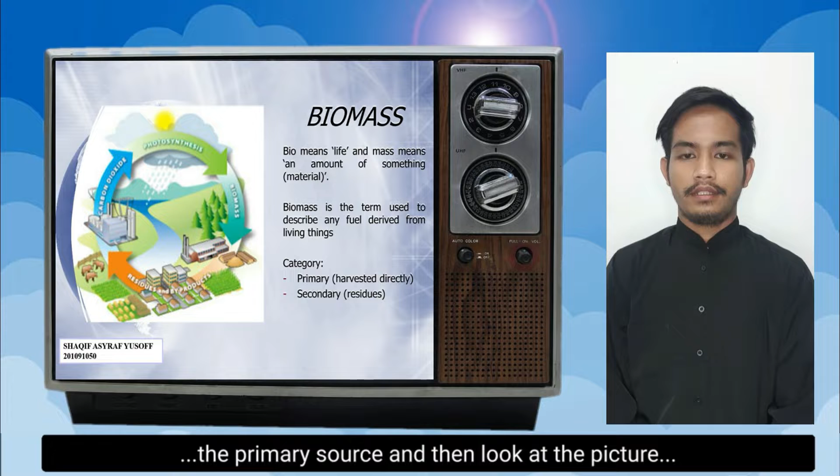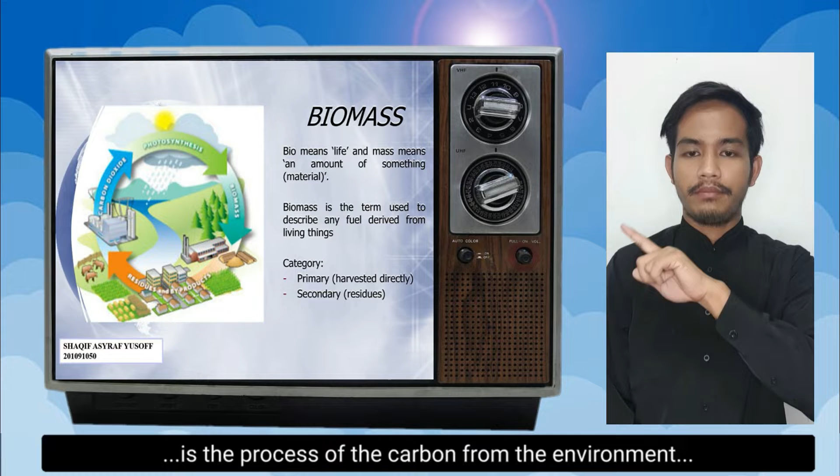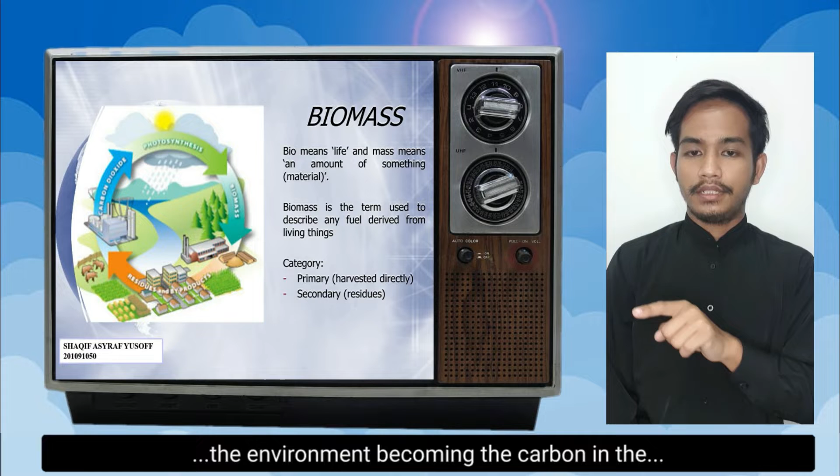Look at the picture on the left, that is the carbon cycle, which is the process of carbon in the environment being absorbed by plants through photosynthesis, and then we use it as biomass energy. After that, the byproduct is released into the environment, becoming carbon in the environment again, and the cycle returns.

There are 6 typical biomass sources: forestry crops and agriculture, MSW or municipal solid waste, industry residues, animal residues, agriculture crops and residues, and the last one is sewage.

There are mainly 3 methods of harvesting energy from biomass: thermal, chemical, and biological conversion. In thermal conversion, we have...

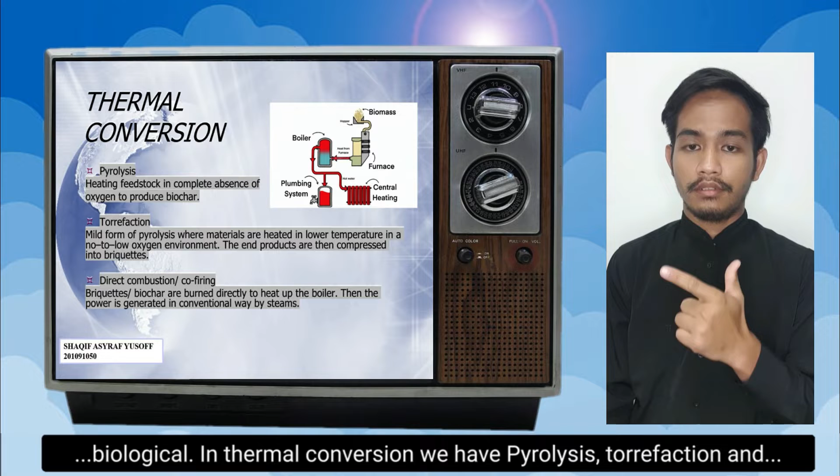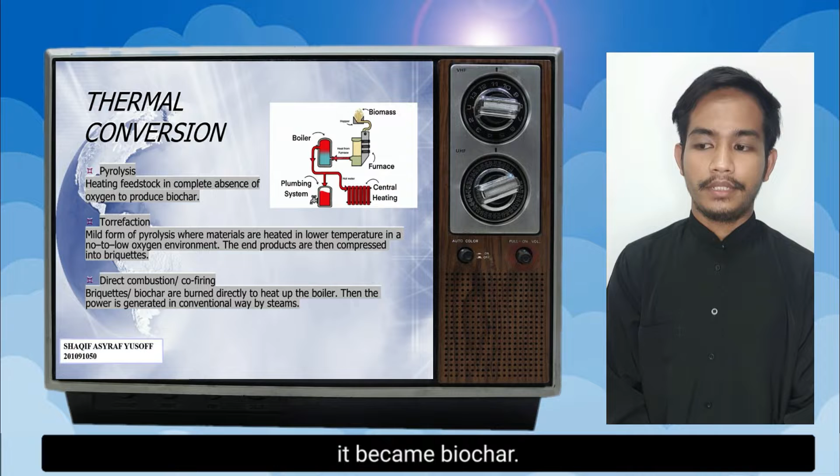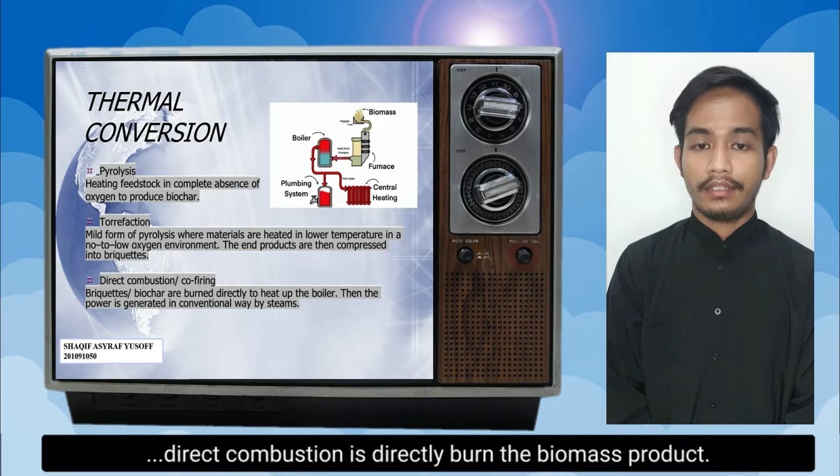pyrolysis, torrefaction, and direct combustion, where in pyrolysis we heat the biomass product in complete absence of oxygen until it becomes biochar. The same process applies in torrefaction, but a lower temperature is used in heating the biomass. Direct combustion is directly burning the biomass product.

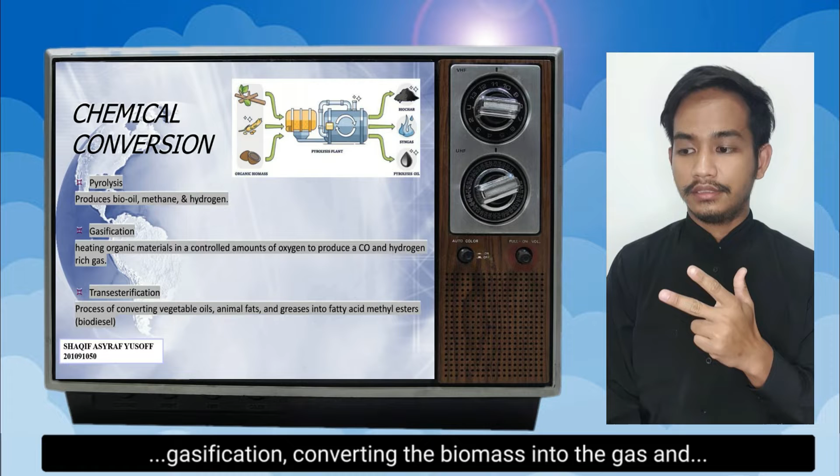Next, we have chemical conversion. We have 3 types of chemical process: pyrolysis, just like in thermal conversion; gasification, converting the biomass into gas; and transesterification, converting vegetable oils and animal fats into fatty acids that we can use as biodiesel.

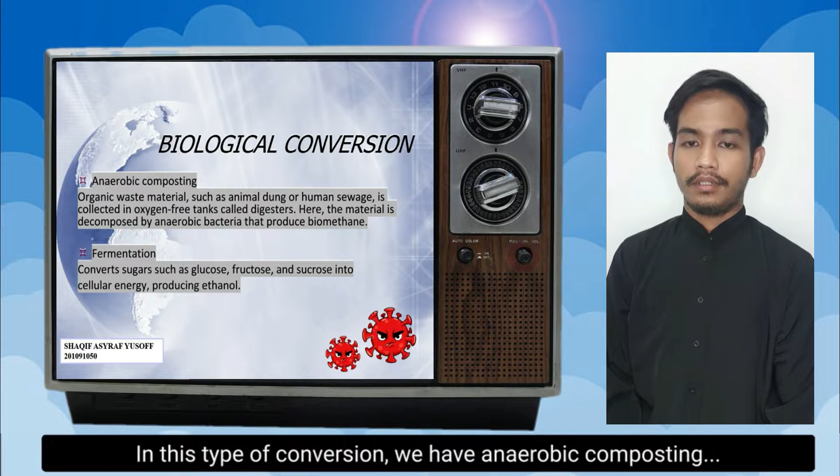Lastly, we have biological conversion. In this type of conversion, we have anaerobic composting, that is collecting organic waste such as animal and human dung into a tank in absence of oxygen, then letting composting bacteria decompose the biomass in absence of oxygen, letting the bacteria respirate anaerobically to produce biomethane.

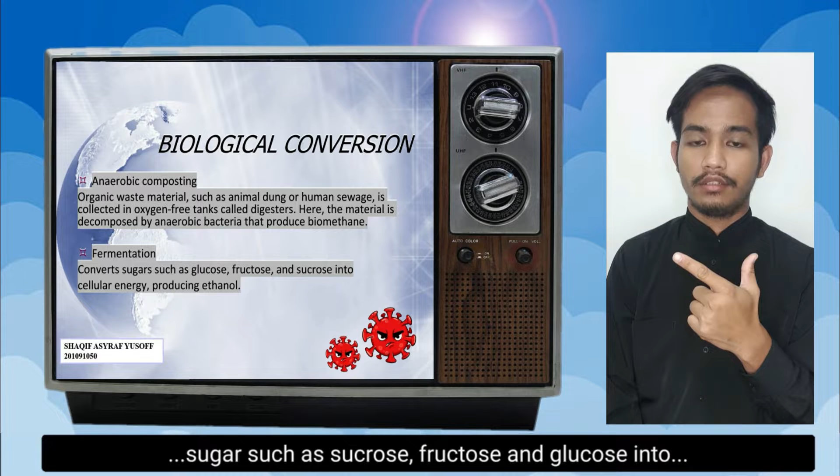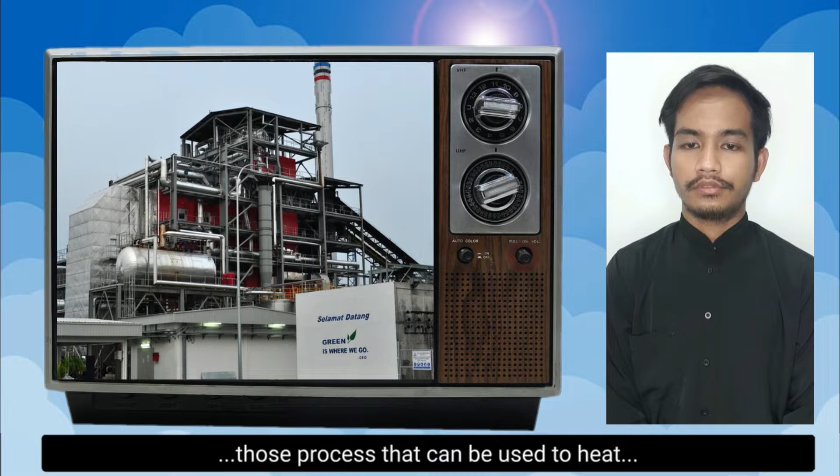Second is fermentation, which is converting sugar such as sucrose, fructose and glucose into cellular energy by producing ethanol. Those fuels produced by these processes can be used to heat up boilers to make steam and conventionally generate energy like other power plants.

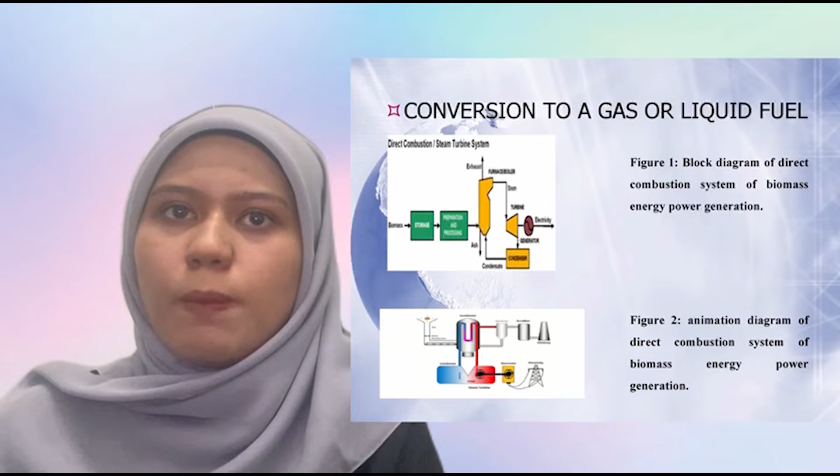In this assignment, we consider a general model for a biomass particle of arbitrary size in which chemical, physical, and thermal processes are taken into account. The model can be readily extended to 2 or 3 dimensions. The particle geometry can be spherical, cylindrical, or slab, and is represented in a one-dimensional framework.

For the shrinkage model, the shrinkage factor accounts for the change in volume due to particle mass loss, which takes place when a particle undergoes thermochemical conversion. The shrinkage factor theta is defined as the ratio between the current volume of a particle and its initial volume. A value of 0 represents constant density, and 1 represents constant volume during thermochemical conversion.

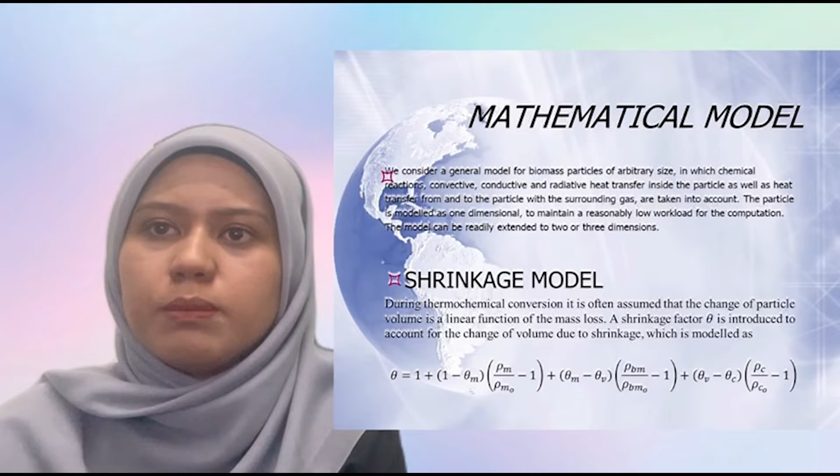If char oxidation is controlled by external diffusion, it can be assumed that during the char reaction the density remains constant. Shrinkage not only happens due to the loss of mass from the particle, but also due to rearrangement of the chemical bonds and structure of virgin biomass and char.

Second is the pyrolysis model. Biomass pyrolysis is a multi-scale chemical and physical process. A fundamental modeling approach should be built up from the smallest relevant scale, taking into account the detailed physical and chemical processes. It was shown that for low moisture, the structure of the pulverized wood flame is not sensitive to the use of different models. A systematic approach is employed to compute the yield of different gas species and the composition of tar.

Depending on the reactor conditions, the amount and composition of char residue can be different. Typically, char consists of carbon and a smaller amount of hydrogen and oxygen. This means that for operating conditions similar to those of an industrial furnace with a high heating rate environment, the assumption of pure carbon for char is reasonable.

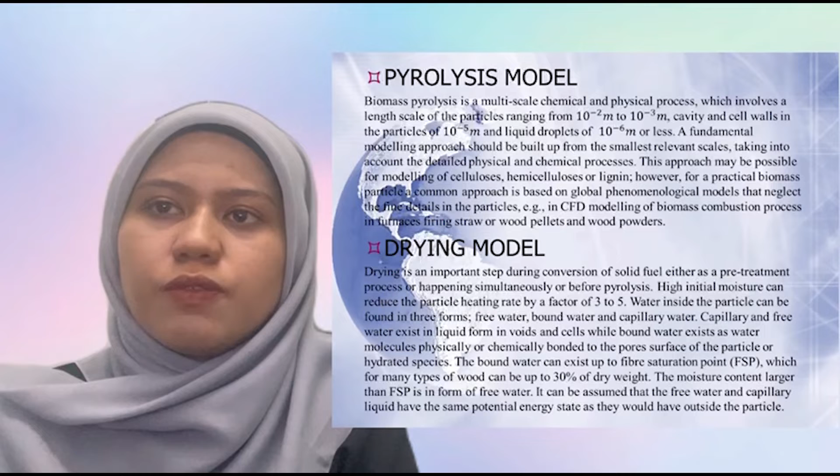Third is the drying model. Drying is an important step during conversion of solid fuel, either as a pre-treatment process, or happening simultaneously with or before pyrolysis. High initial moisture can reduce the particle heating rate by a factor of 3 to 5. Water inside the particle can be found in three forms: free water, bound water, and capillary water.

Okay, that's all from me. Thank you.

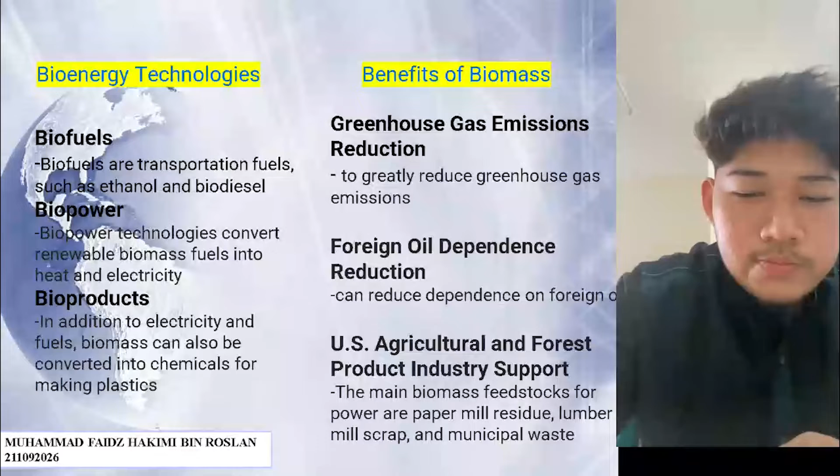Biomass facilities can generate anywhere from 2 to 1,000 megawatts of electricity. At the end of 2014, Canada had 70 biomass power plants, which together can produce 2,043 megawatts of electricity. Industries such as pulp and paper plants use about two-thirds of this electricity.

Atikokan Generating Station is North America's largest 100% biomass power station, located in Northwest Ontario. This station used to generate power by burning coal. After modification in 2014, it now burns wood pellets, generating 205 megawatts of electricity, enough to power about 70,000 homes.

The three most common sources are natural gas, coal, and nuclear power. Some of the faster growing sources are renewable resources such as wind and solar. Most United States electricity is generated at centralized power plants. A much smaller but growing amount of electricity is produced through distributed generation, a variety of technologies that generate electricity at or near where it will be used, such as on-site solar panels and combined heat and power.

Approximately 86% of modern bioenergy is used for heating application, with 9% used for transport and 5% for electricity.

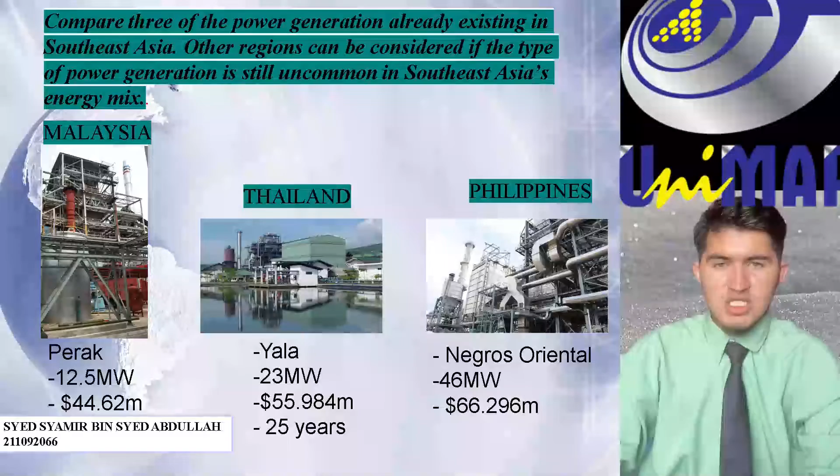Next is Kabankalan Biomass Power Generation in the Philippines, located in Negros Oriental, producing 46 megawatts and costing 66.2 million. Energy security is among the top concerns of the Philippines as a developing economy. The response to such a challenge is to prudently manage the existing supply of fuels such as coal and oil, upon which the country's energy mix has mostly been based. However, with growing worries about environmental impact, as well as the rising cost of these energy sources, exploring renewable alternatives has become urgently necessary.

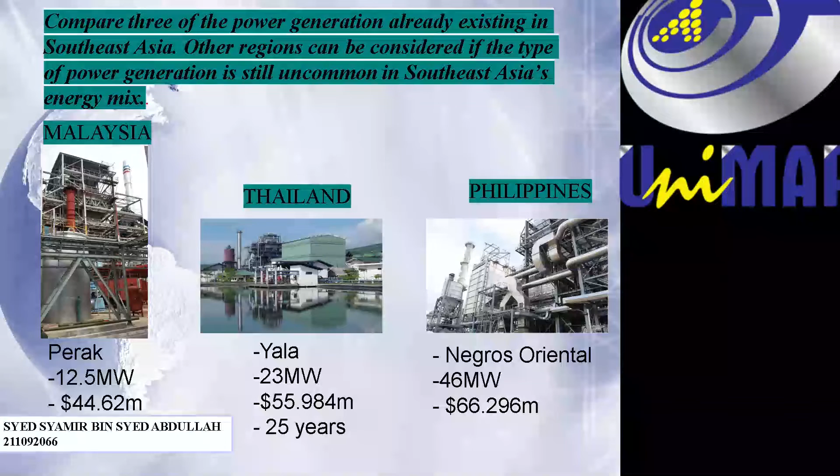Today I'm going to present my part of the power system assignment task. This presentation includes two parts: the advantages and disadvantages of biomass power systems.

Due to the abundance of plants on Earth, biomass has the potential to be a significant source of renewable energy that can be utilized as a long-term replacement for fossil fuel. Biomass is regarded as a renewable energy source since it can quickly regenerate and because the energy it emits comes from the sun. The carbon dioxide that trees have taken in from the atmosphere is released back into the atmosphere when they die.

Furthermore, our over-dependence on fossil fuel is reduced by biomass. Fossil fuels are not only limited in supply but also have detrimental consequences on the environment due to the high volume of carbon dioxide they emit into the atmosphere, and the pollutants created during production, transportation, and extraction.

What role does biomass play in reducing our reliance on fossil fuel? Numerous fuels such as bioenergy, also known as energy from biomass, are a sustainable alternative to fossil fuel that may be produced from renewable sources like plants and waste that can be continuously supplied. Next, the production of biomass provides manufacturers with a new stream of revenue by converting their garbage into biomass energy.

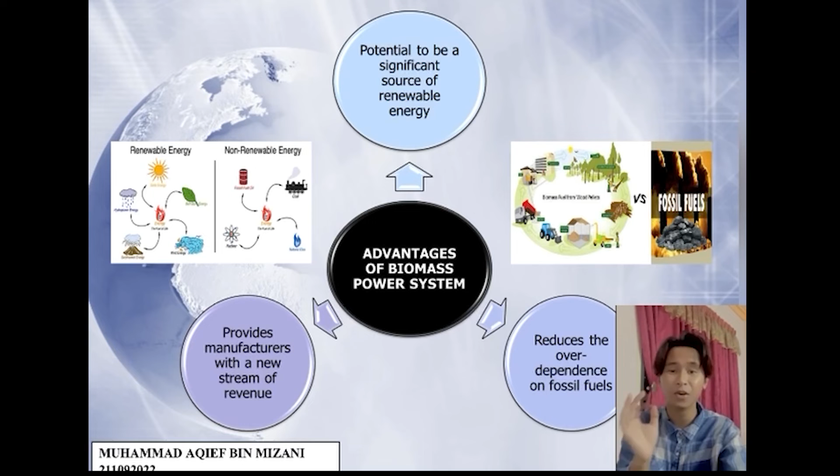Producers and manufacturers might make more money from a smaller production by generating new jobs, boosting economic growth, and fostering a greener environment by reducing emissions and air pollution. Biomass energy provides the local community with significant economic benefits.

For the disadvantages part: compared to fossil fuel, biomass energy is less efficient. The main disadvantages of biomass energy are that it is expensive, requires a lot of space, still releases greenhouse gases, can have a negative impact on the surrounding environment, and is inefficient in terms of how much energy it takes to create electricity.

Some biofuels such as ethanol are less efficient than gasoline. In order to boost effectiveness, it actually has to be strengthened by fossil fuel.

In addition, biomass is not completely clean. Even though biomass is carbon neutral, combining human and animal waste increases the amount of methane gases, which is also bad for the environment. Furthermore, pollution from burning woods, plants, and other natural resources can be contrasted with pollution from burning coal and other types of fuel.

Burning organic material produces heat, which creates steam that powers a turbine to produce electricity. This process is known as biomass or organic matter combustion.

Lastly, biomass may lead to deforestation, since one of the most popular biomass energy sources is wood. A huge amount of wood and other waste must be burned in order to produce the necessary amount of energy. That is a danger of future deforestation even if there is currently enough wood debris.

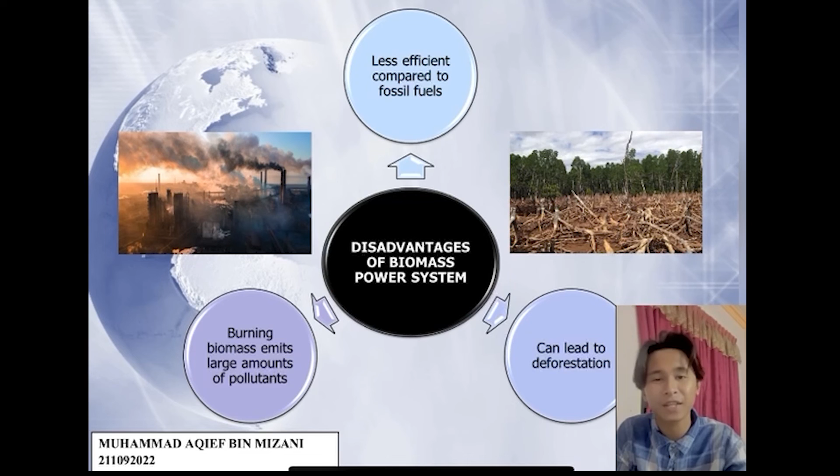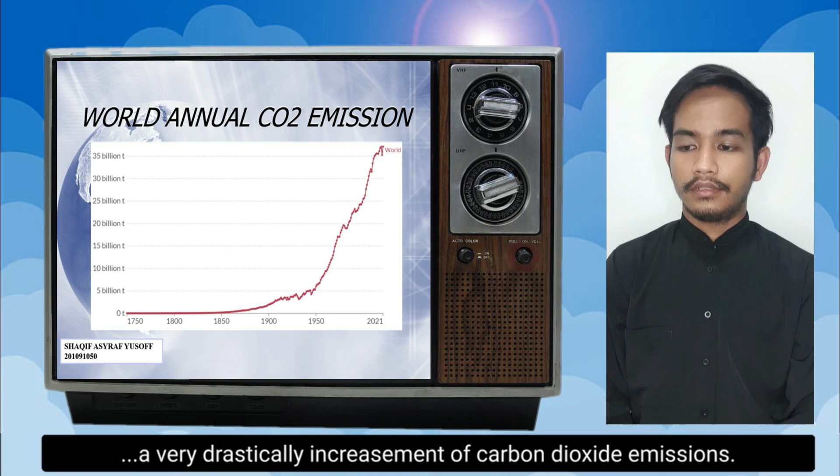This CO2 can lead us to global warming. Global warming can give us four main effects: increasing world temperature, rising sea levels, shrinking mountain glaciers, and accelerating ice melt. Hopefully, by using bioenergy and alternative energy such as biomass, we can decrease the emission of carbon dioxide.